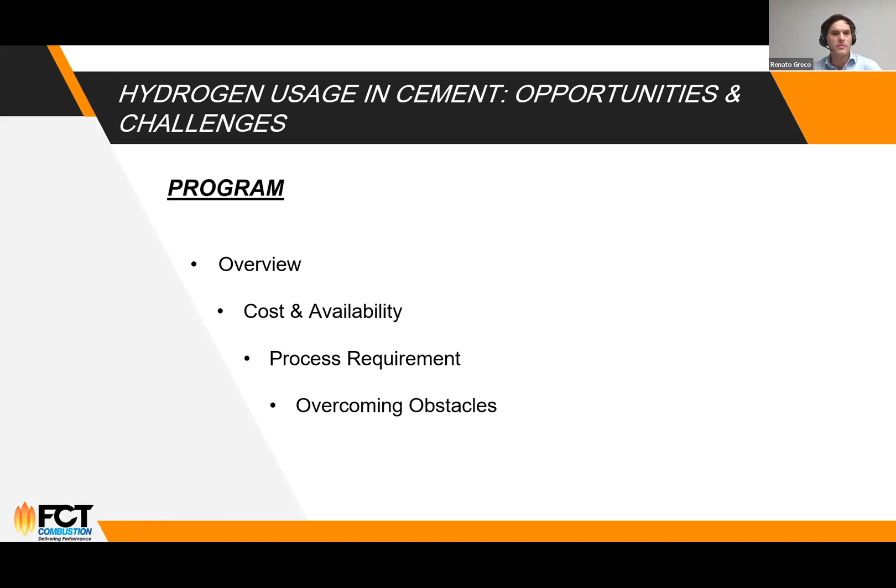To start with some general information, we produce about 90 million tons of hydrogen in the world, and most of it, if not over 95%, is hydrogen produced with unabated emissions of CO2. Meaning, to generate hydrogen today, apart from electrolysis and methane steam reform with carbon capture, hydrogen produces more CO2 than most fuels, like natural gas and fuel oil.

So the key thing here is, unless we use electrolysis or methane steam reform with carbon capture, our hydrogen is not doing any good to the environment.

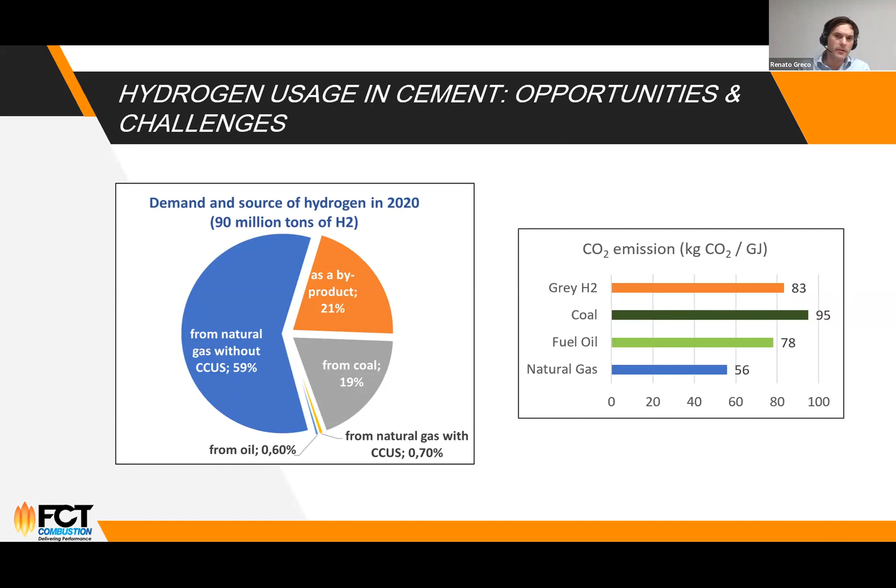Getting back to the future in 2050 - this is, I don't know why it's repeated. Sorry, I went to the wrong slide, sorry.

So pretty much we have to align costs with availability and resources and the process in the cement kilns. We are looking to reach this small area that today is really challenging because costs are high, and we have no availability, or it's a very small availability.

And regarding the process, there are some ways to use hydrogen, but we'll see that it's not so simple to replace all the fuel in a cement plant or cement kiln with hydrogen.

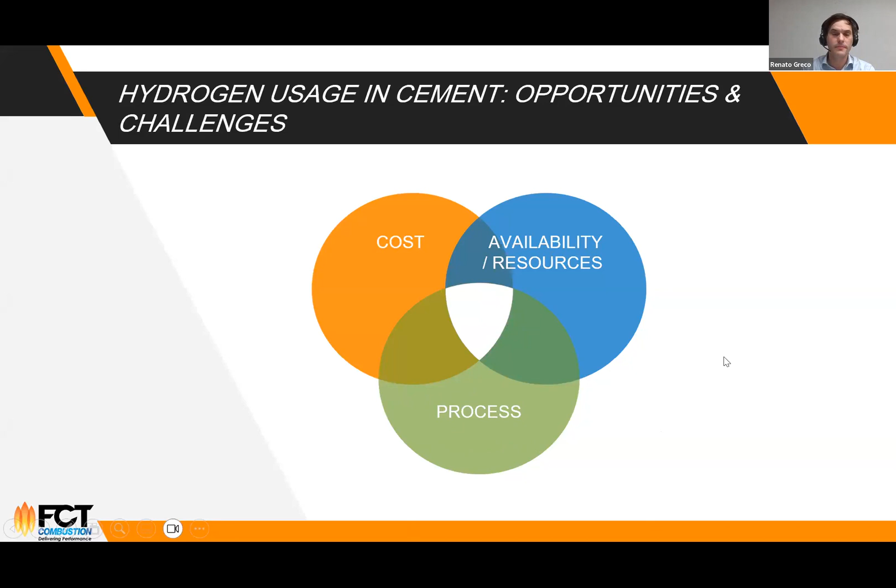Cost and availability depends on the technology for sure. If it's methane steam reform, that's one price. If it's electrolysis, that's a different price, and you need renewable energy - otherwise you are still emitting CO2. So do you have renewable energy available, and what's its price?

If we are talking about methane steam reform, natural gas price is important. CO2 price is part of the equation as well, and it can play an important role in the overall economics of using hydrogen in cement plants.

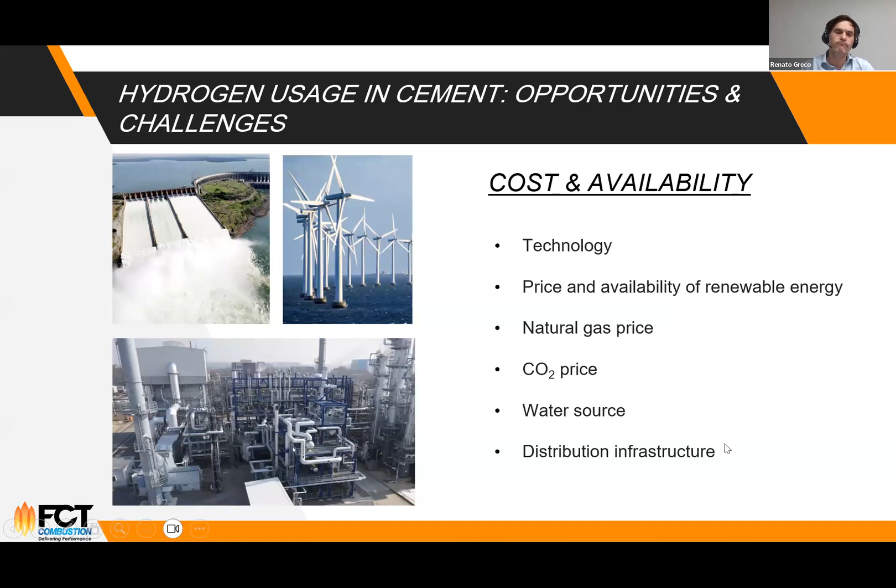And if we talk about electrolysis, do we have water? In some places, like the Middle East, we don't have water - I mean, you have water, but you have to use desalination, which is an increased cost, to make seawater proper for electrolysis. And do we have distribution infrastructure to get the hydrogen produced to the end user?

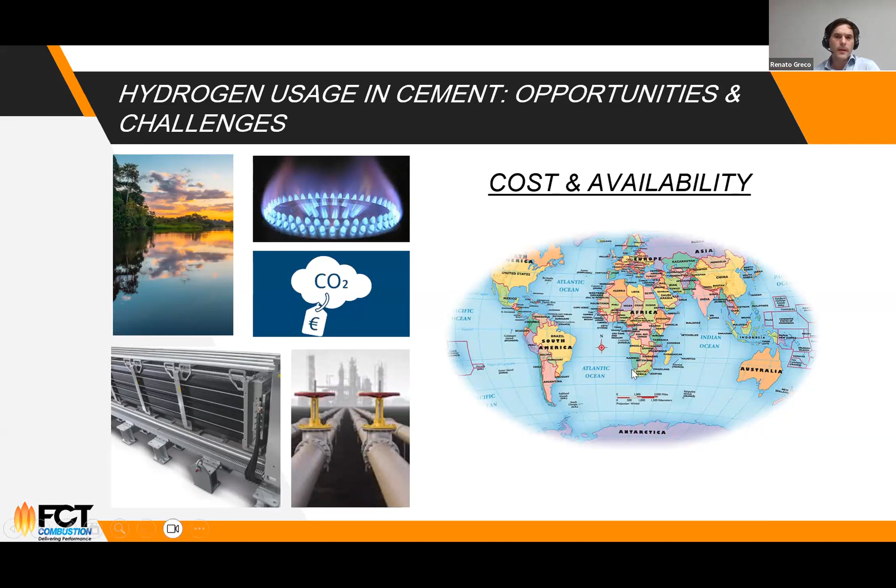So pretty much it's difficult to put a price to the kilo or gigajoule of hydrogen, because it depends a lot on where you are in the globe - whether you have renewables or non-renewables, natural gas prices, CO2 prices, and so on. I'll try to give a picture of what we have today in terms of studies on the cost of a kilo of hydrogen.

This is the cost in different countries for producing 1 kilo of hydrogen, assuming you have photovoltaic panels. This is only for production - there is no distribution, no margin, it's not a sales price. If you go to Japan, for instance, you'd have about $9 per kilo to produce hydrogen.

If you go to the European Union, it's 4.3, Canada 6.7, Italy, France, Germany, and so on. So as I mentioned, it will depend a lot on where you are to get a reliable price for hydrogen.

Of course, the lower the cost of capital - the weighted average cost of capital - and the lower the cost of the photovoltaic plant, solar panels, the better.

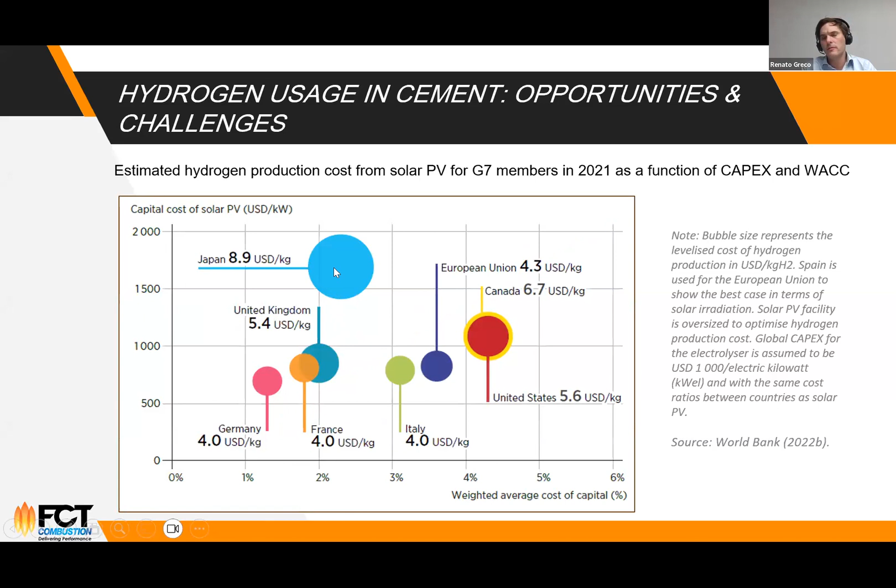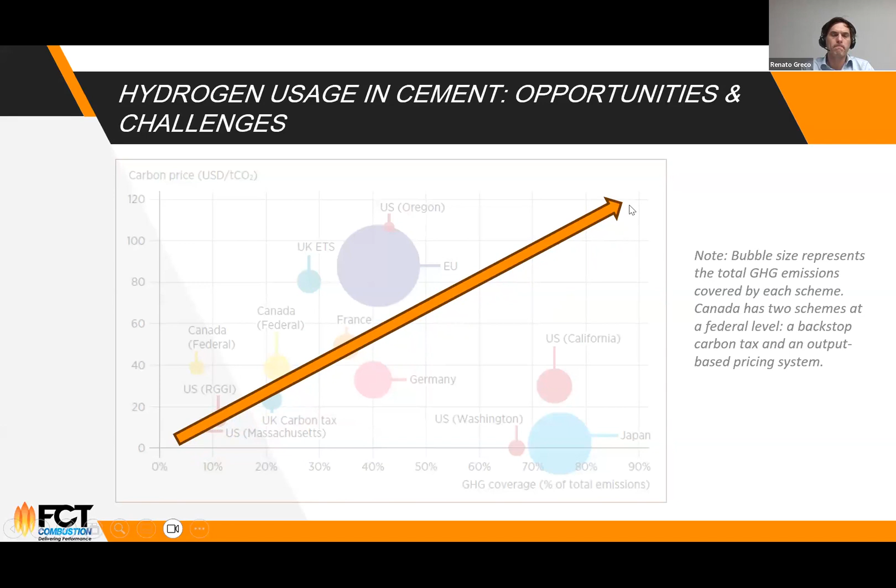So from the economic perspective, it's still not feasible unless, as Thais mentioned, you use it as a fuel enhancer - using a small part of hydrogen in your total fuel matrix to be able to use other, cheaper alternative fuels.

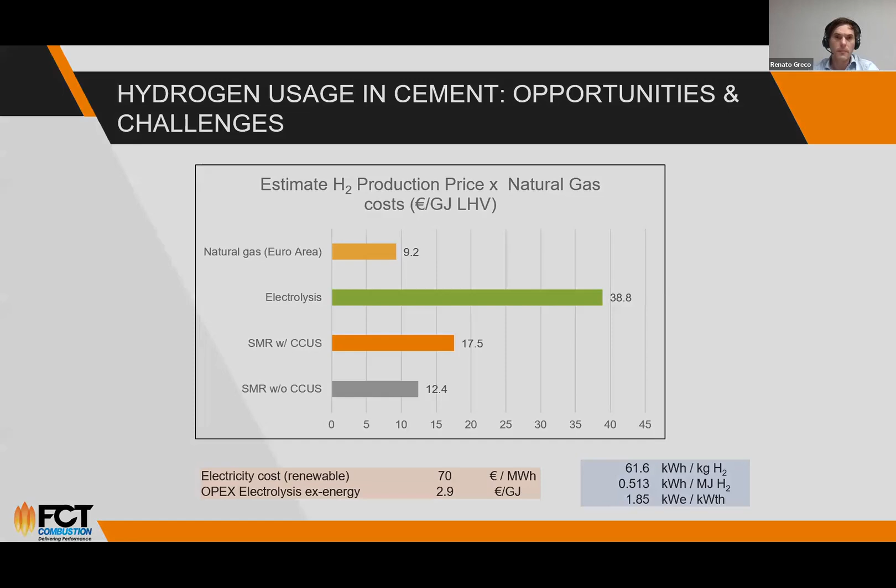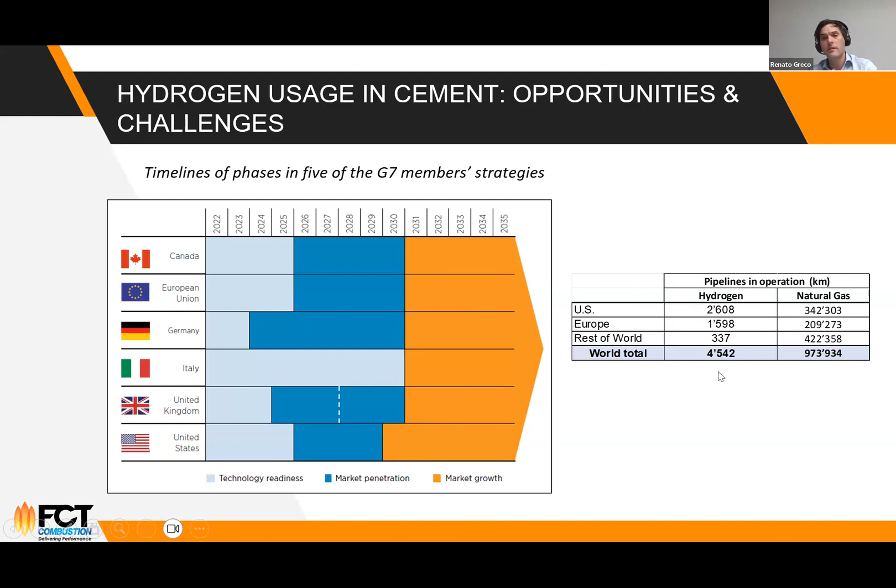So it will take time, and it will take a lot of investment.

Getting to the process - what we want in the kiln, and I'm talking specifically in the kiln, in the rotary part of the kiln, not the calciner itself - the process requires radiation, because it's the main heat transfer mechanism.

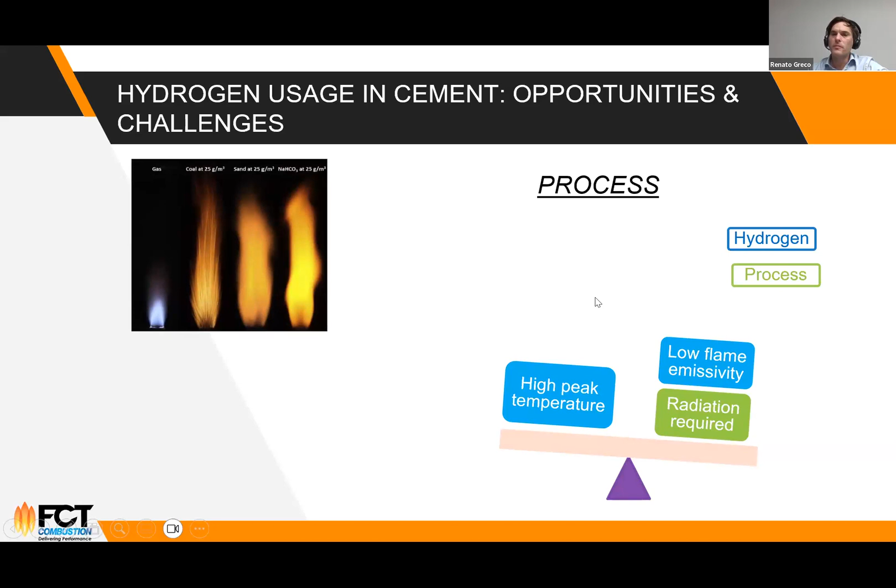And when I use hydrogen at 100%, at least, we will have low flame emissivity and very high temperatures. So it doesn't mean we cannot use it - we can use it, but together with other fuels.

For instance, if you have coal, or you have MBM, or tires, or other fuels that can produce significant radiative flame, then it's fine.

Here you see the effect of adding - this is gas, and then if you add coal, or sand, or sodium bicarbonate - you see that the luminosity of the flame increases significantly.

This is in a cement kiln, in fact. On the upper part, it's a burner using 100% natural gas, and with hydrogen it will be even worse than this. And the same burner with 30% natural gas and 70% coal - you see a huge increase in the luminosity of the flame.

So this increases the emissivity, and then we can keep the kiln operating in good conditions without losing production or changing the clinker quality.

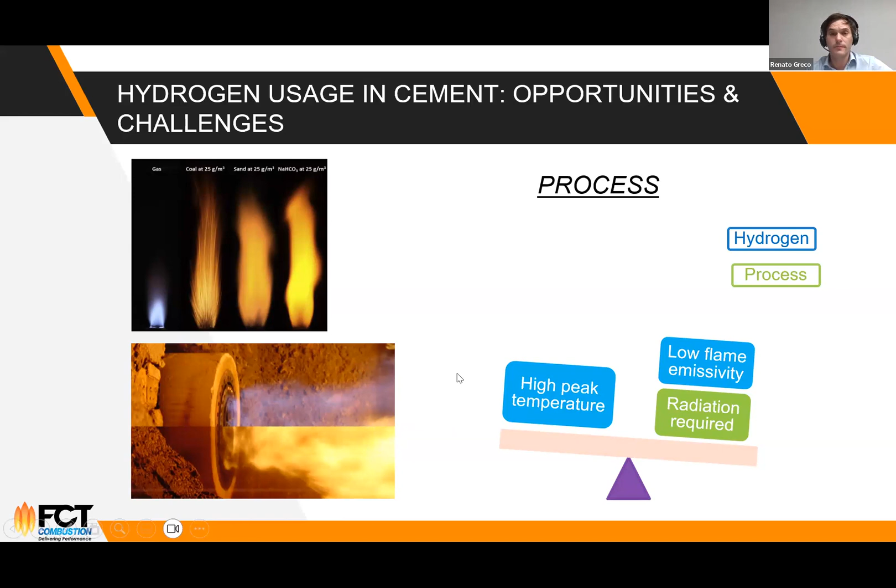If we go for 100% hydrogen, which would be extreme, we would have a longer thermal profile. We expect, compared to a coal flame, a higher peak temperature closer to the burner tip, and then a smooth decrease in the thermal profile due to the very poor radiative heat transfer of the hydrogen flame.

So at this stage, we don't see hydrogen as being a fuel for 100% use in rotary kilns.

Naturally, hydrogen in the calciner, where radiation is not so important, depending on the calciner, this problem would be minimal.

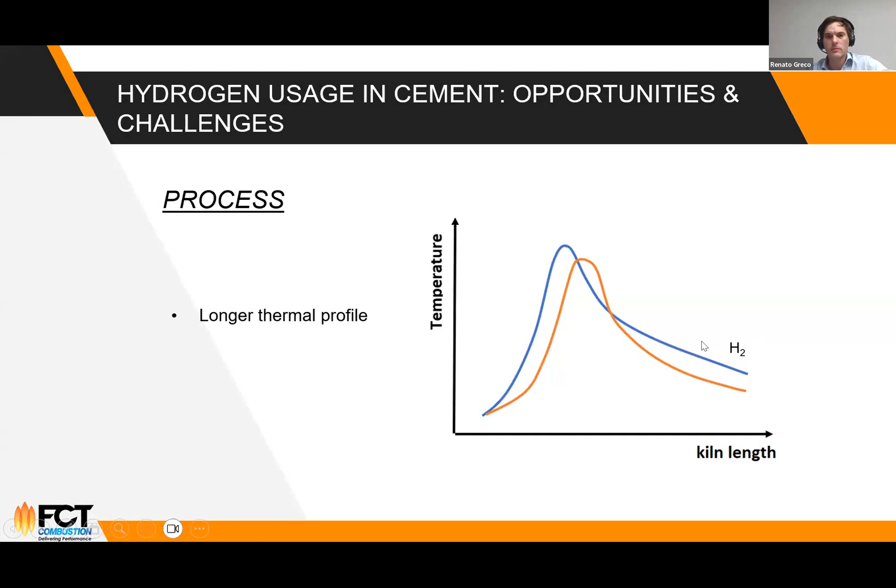We expect high NOx generation, as Thais showed with the simulations and in the tests. Hydrogen use can lead to a significant increase in NOx. So here we have a flame in the laboratory, a lab test. 100% methane, and then increasing the percentage of hydrogen. You see that NOx increases a lot.

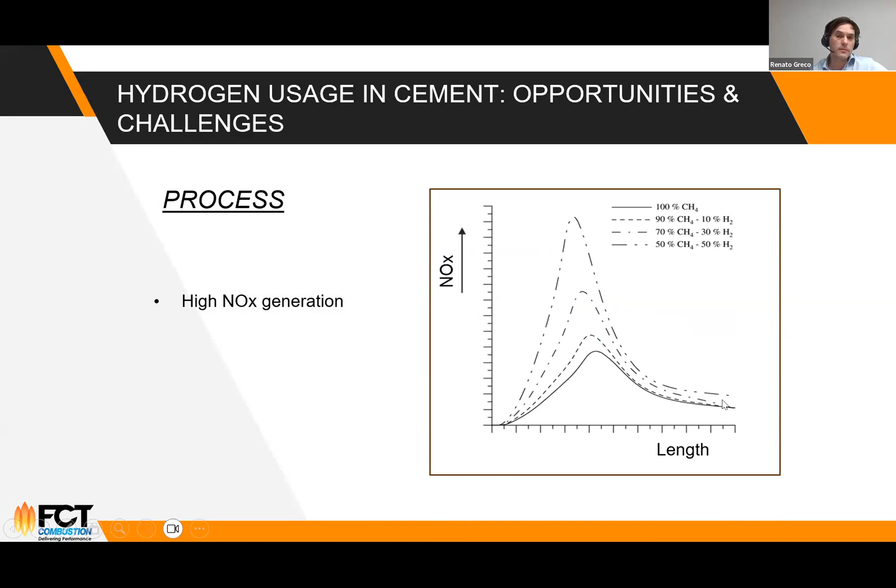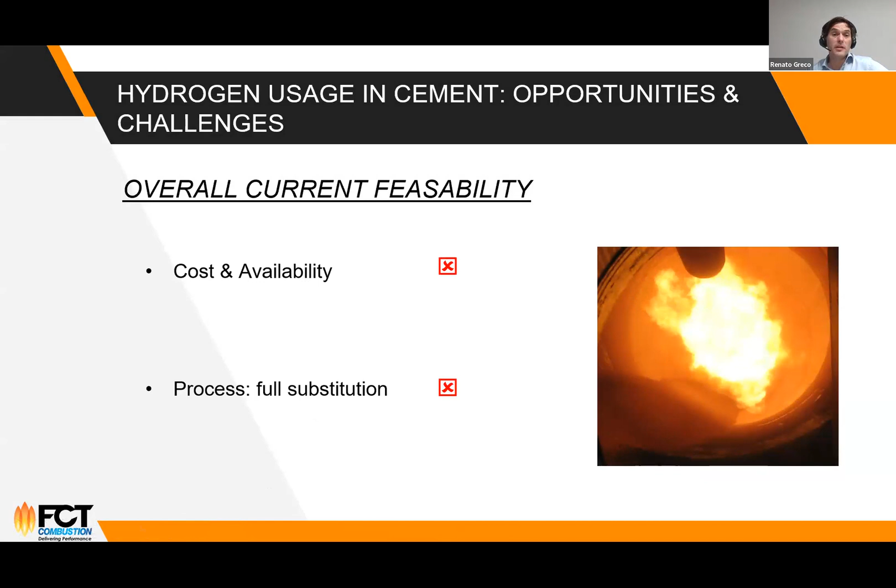So as of today, cost and availability, we are not there, and full substitution of hydrogen, we are not there. What we see as possible in the future is that there is massive investment in improvement of technologies, so the price will go down, and the renewable energy, the electricity produced with renewable sources, will go down as well. We'll have to pay a price for it if we want it. It will be, if you put a penalty on CO2 emissions, we'll have to pay it. So if we increase the environmental consciousness, we will do it because it's good, but there is a price.

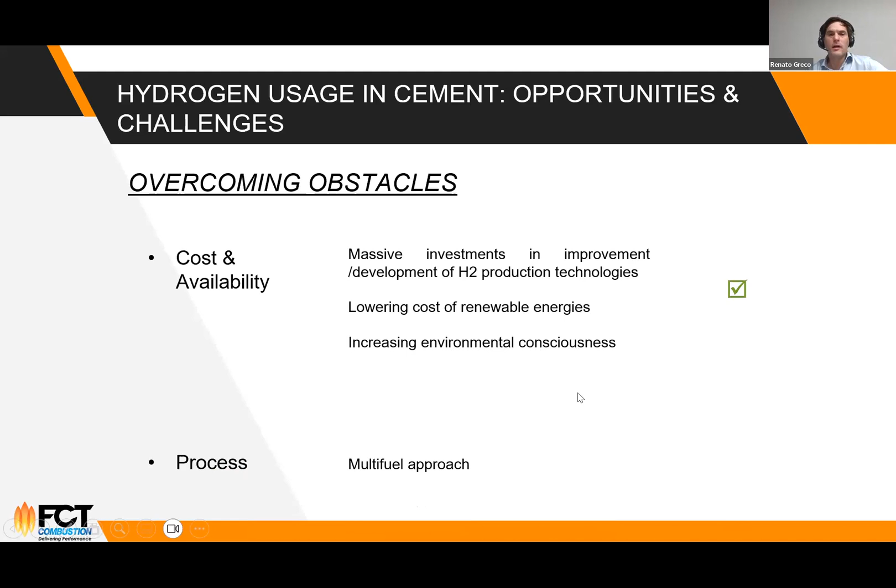And from the process perspective, we understand that the multi-fuel approach is the only way to go, and it means use small percentages of hydrogen in the total mix. For instance, for countries where natural gas is available, you can dope the natural gas with 5% hydrogen in the supply line, and you don't even have to change the pipes or make modifications to the pipeline. So this could be a possibility.

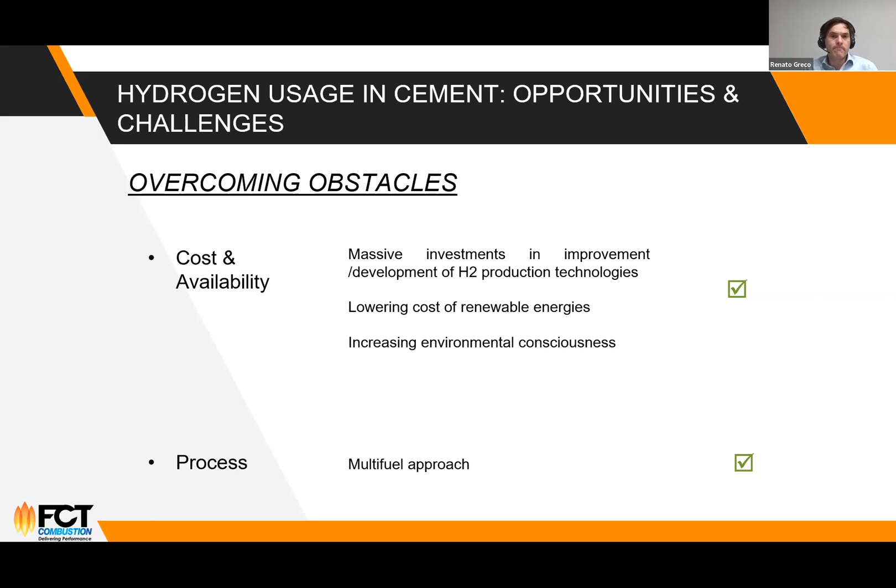So I think I am in time, and this is the last slide. Thank you.

Thank you very much for that, Renato. A really interesting presentation, again highlighting the challenges of burning hydrogen at very high levels, but at smaller levels, certainly up to 5%, it's very viable with existing infrastructure and systems. And I think what you said at the end there about doping natural gas pipelines seems like a very sensible approach. So for any producers out there using natural gas as their primary fuel, that's something to keep an eye on - a big advantage in some respects.

And you highlighted the multi-fuel approach, which is really the way forward. Again, I think the biggest problem is the cost and the supply. Do you see that changing quickly in the next 5 to 10 years, or are we looking at a longer time horizon?

I see it at a longer time horizon. Prices are dropping in terms of dollars per kilo, dollars per gigajoule. They are dropping, but they are not comparable to the traditional fuels, coal or petcoke or natural gas. It's still not competitive. But again, if there is an incentive, why not?

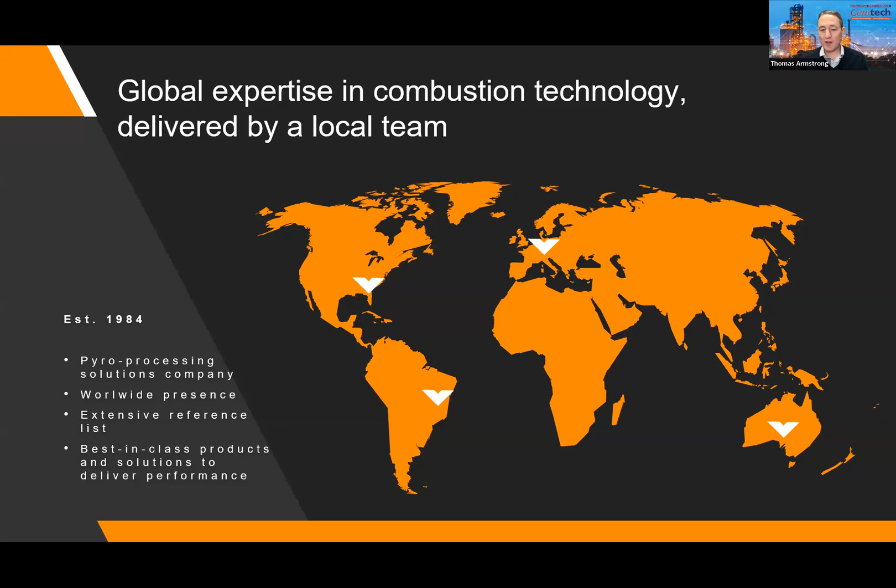Very good. Well, thank you very much, Renato, for the presentation. And that brings us to the end of this session.